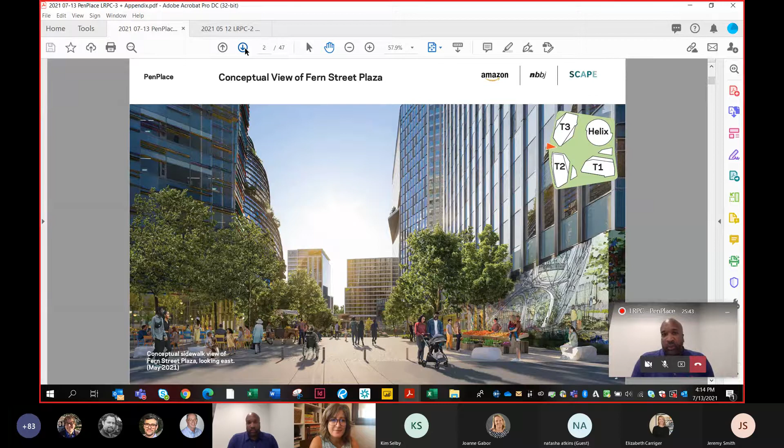We believe PenPlace presents new opportunities to create a unique and special place that will integrate with the surrounding community. We look forward to sharing the massing evolution, and thank you for your input. We will also provide more information and updates on interior site circulation. There were some great suggestions last meeting on how to strengthen the north-south and east-west connections through the site.

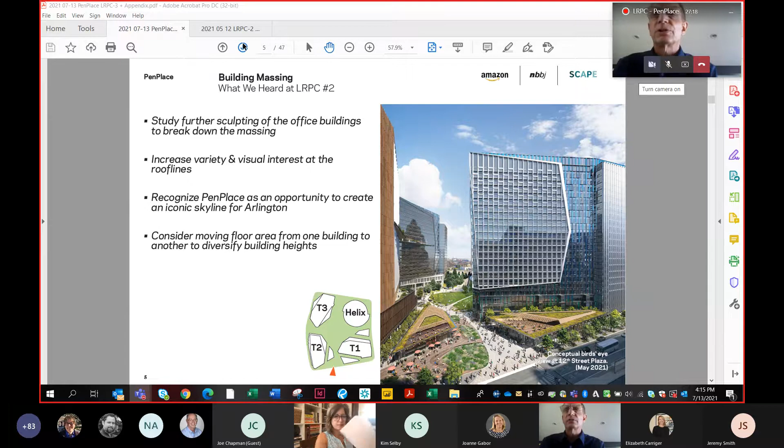So if you go to the next slide, we'll start with what we heard from you last time. This is a summary of several comments in the discussion we had. First, we were asked to study further the sculpting of the office buildings to break down the massing across the site, increase the variety and visual interest at the roof lines, which is a key element and will have a significant contribution to Arlington's skyline. And recognize PenPlace as an opportunity to do that—consider moving the floor area from one building to another to diversify building heights. We'll talk about that and the challenges around that.

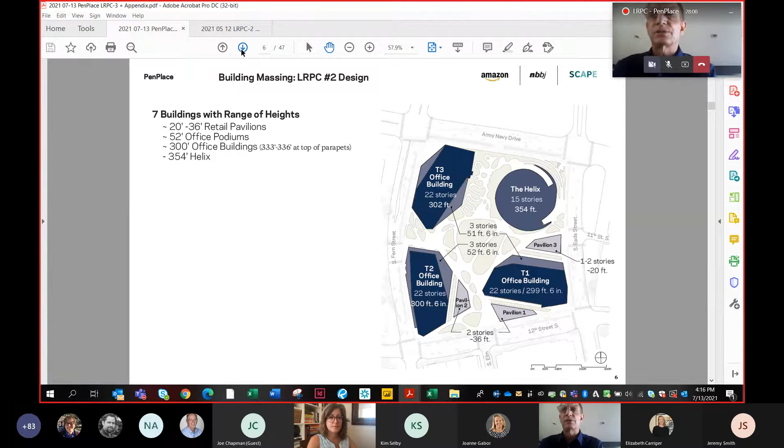Starting with the overall site plan and the massing as we shared it with you last time, we shared the size of the buildings, the heights, the footprints they occupy on the site, and talked about the spacing of the towers and various heights across the site. As a quick recap, we have 7 different buildings on the site, and the 3 office towers are each 22 stories and slightly shorter than the Helix building, which is the tallest building on the site. They're accompanied by much smaller pavilion buildings, which add a lot of interest and scale at the pedestrian level.

What we have done since then is gone back and really looked at refinement around these buildings, looking inside out and outside in, making them as efficient as we can for the owner. We've realized there are some gains to be made here in efficiency internally, which will also yield additional space on the site. You can see in the yellow zones here, the buildings have reduced in footprint in each case, and we'll talk about how that improves some of the site conditions.

First, it increases the tower spacing and the site porosity. By site porosity we mean visibility from the neighborhood into the site, to this very important central space, to the helix, to the retail, and so on. That also includes additional light into the space because the towers are slightly shorter in each case—there's an additional amount of light that can penetrate into the middle of the site. And of course, it helps reduce the bulk and the appearance of the buildings.

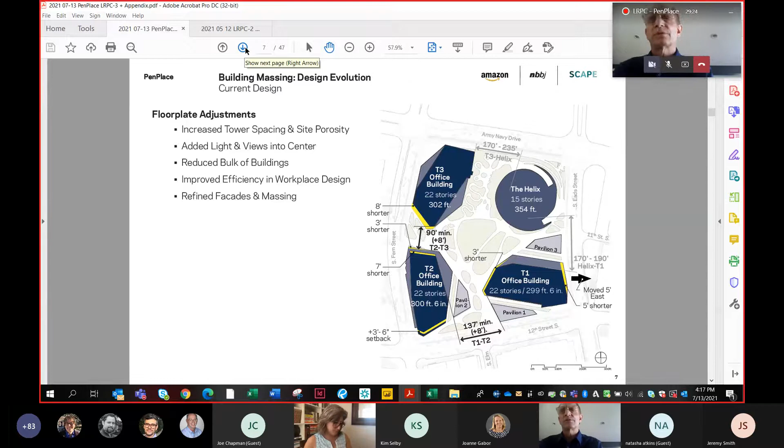I talked about efficiency of workplace already, and from that point on we'll start to think about the refinements in the facade and the massing.

First, we'll take a look from eye level now at what this change gives us from the pedestrian point of view. This is a before and after set of images. So from 12th Street, as you enter the site mid-block along 12th—one of the major entry points into the site—we're thinking very carefully about the spacing of buildings, the visual access you have as you're walking into the site, what you see, and your access to sky and daylight.

What we had initially was an overall separation between Tower 1 and Tower 2 of 129 feet, and between Tower 1 and Pavilion 2, the small pavilion on the left, of 57 feet. Then the clear walking space between Tower 1 at this closest point and a major landscape feature was 19 feet. If we go to the next slide, you'll see that all of those dimensions have increased by 8 feet.

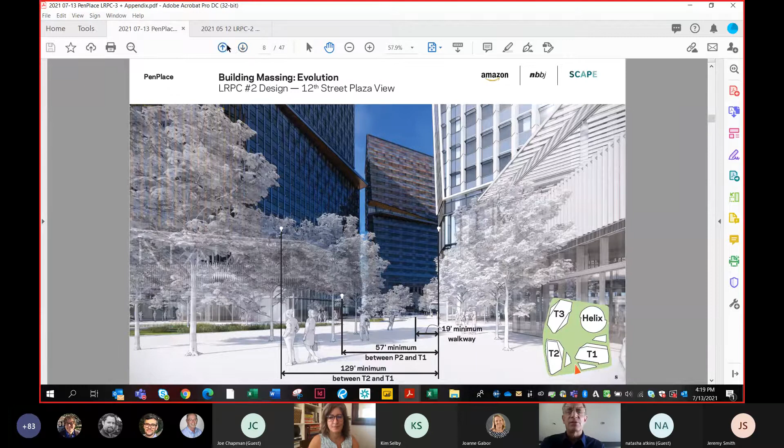Maybe it would be helpful to toggle back and forth for a moment so you can see in the image how the buildings have separated all the way up the towers. That walking space went from 19 to 27 feet. The space between Tower 1 and Pavilion 2 has increased to 65 feet, and the overall separation of towers is increased to 137 feet. So I think visually it does start to really open up the site from this point of view.

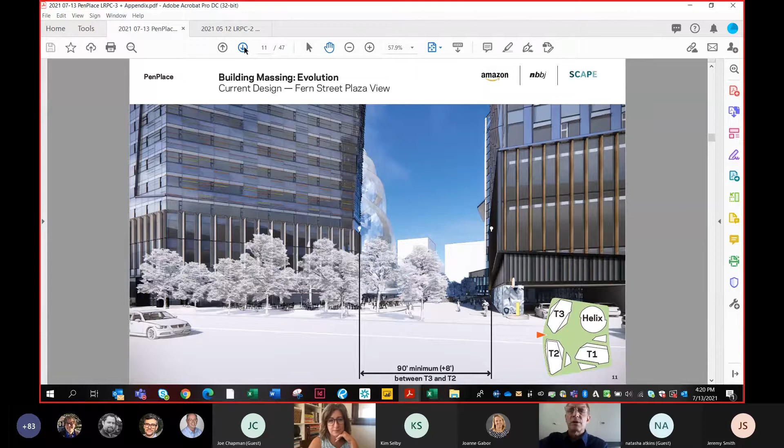Moving to the next key entry point, looking at the entry along Fern Street, we're calling this the Fern Street Plaza, between Tower 2 on the right and Tower 3 on the left. Our previous layout had 82 feet of space between those two buildings, which is generous in an urban context. But because of the efficiency we're realizing in the buildings, we're now increasing that to 90 feet, adding 8 feet again. Interestingly, even that 8 feet significantly improves your view towards the center of the site and the Helix building as you approach from Fern Street and the pedestrian crossing that will occur there.

That kind of gives you a quick look at what the massing or overall footprint changes have given us in terms of the pedestrian experience. Now we want to talk about the overall tower massing of the three office buildings and some new thinking we're prepared to share with you based on the comments you shared with us last time.

So what you see here is where we were last time we talked. Our strategy at that point was to take the glass curtain wall, the exterior skin of the towers, and extrude that up as high as we needed to conceal all the rooftop equipment. These office buildings will have a lot of elements on the roof we don't want to see — cores, generators, cooling towers — things we don't want visible on the skyline. So our strategy was to raise this glass curtain wall up high enough to conceal all of that and make it an integral part of the overall form of the building.

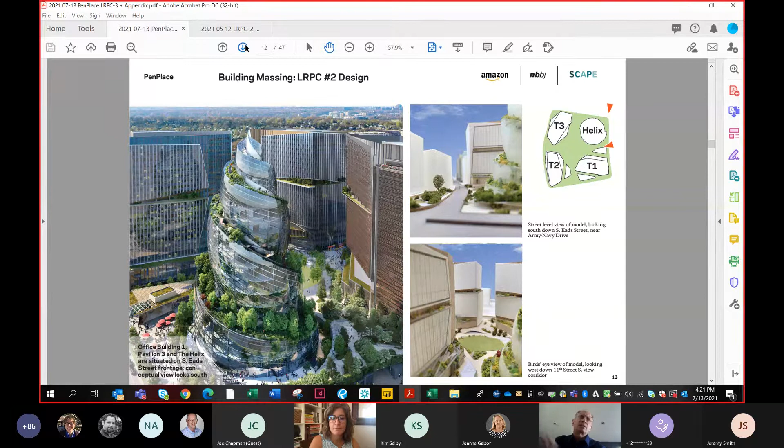I think what that yielded was kind of a flat overall profile across the site, which you all shared some concern about, and a kind of uniformity about how each tower meets the sky. So we've taken a fresh look at this and wanted to step back and think about a way we could enhance the skyline, but do that in a way that's really meaningful and honest about what's going on with the project. I'll explain what that means here in a minute.

There's a number of pretty exciting sustainable strategies that are part of this project, and one of our thoughts was, can we be more expressive about sustainability with this move? It may not be apparent here, but one of the key features on the roof now is a set of photovoltaic panels collecting solar energy and contributing to the project's energy use. That's currently in the project, but it's not visible because of the screening we're looking at. So our thought was, can we make that more integral and part of the expression of the project? We'll share that in a moment.

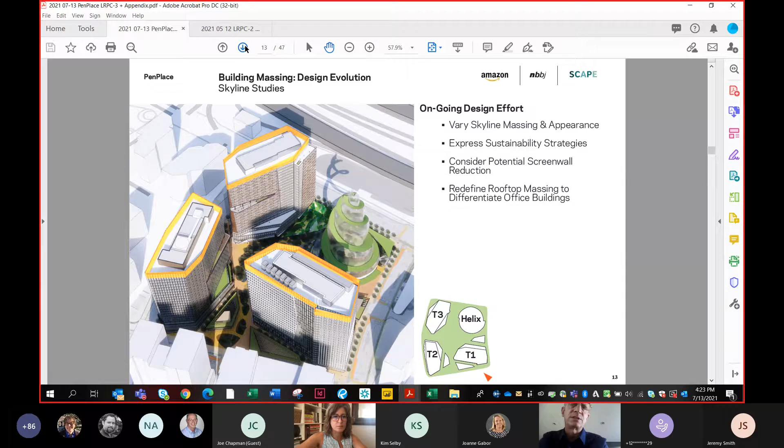So here is a very simplified view. We're really getting to the essence of the topic here, talking about skyline and building profile, stepping back near the top of the buildings.

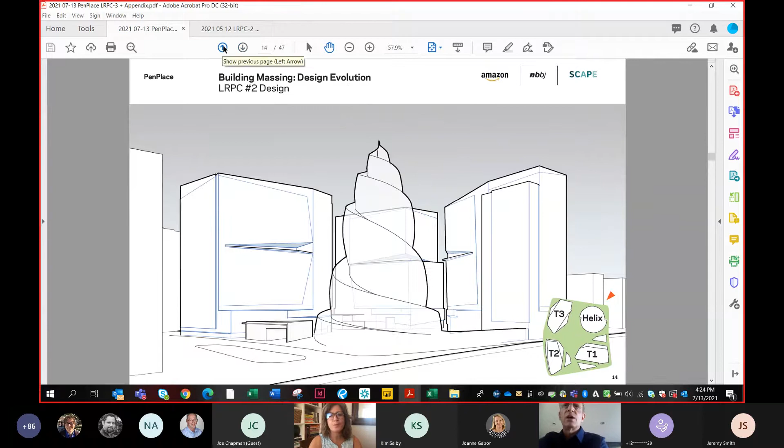So this is where we were in diagram form. You can see it from the northeast corner of the site. We'll take the helix away here for a minute, not really taking it away, but just removing it from this view so we can get a clear view of the three towers and talk about our strategy here.

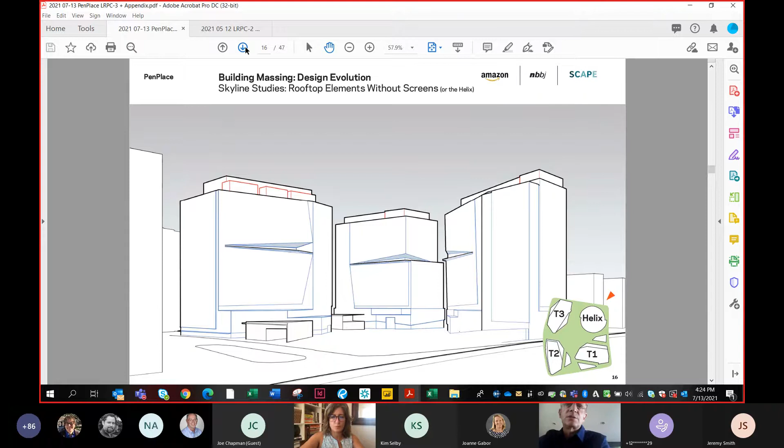So where we were, in the next view, if we take those screen walls off the buildings, you can see what gets exposed. You're seeing rooftop equipment and cores and other things on the roof that we need to conceal.

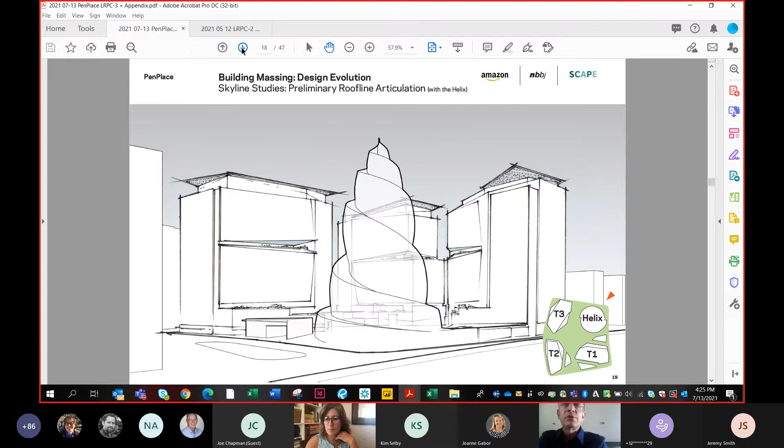So that's what it would look like, the helix back in place, and how it relates to that special building. One thing I will say here, we want to be clear that these buildings are very different than the helix. The helix is meant to be a unique structure, and this expression at the roof line of the towers, we think ought to be complementary to the helix, but not mimic it in any way.

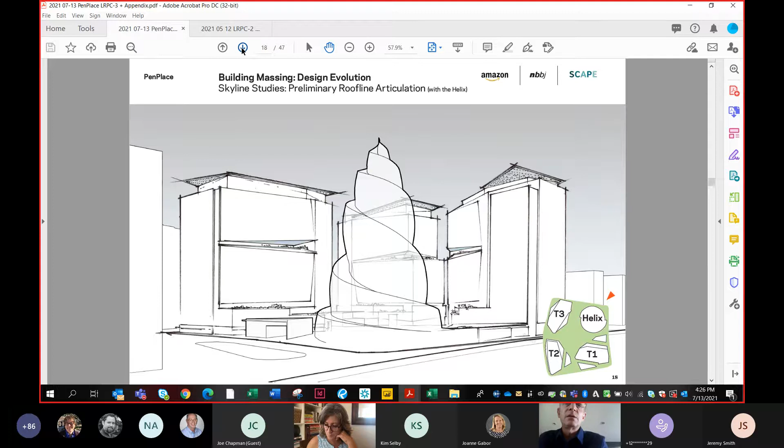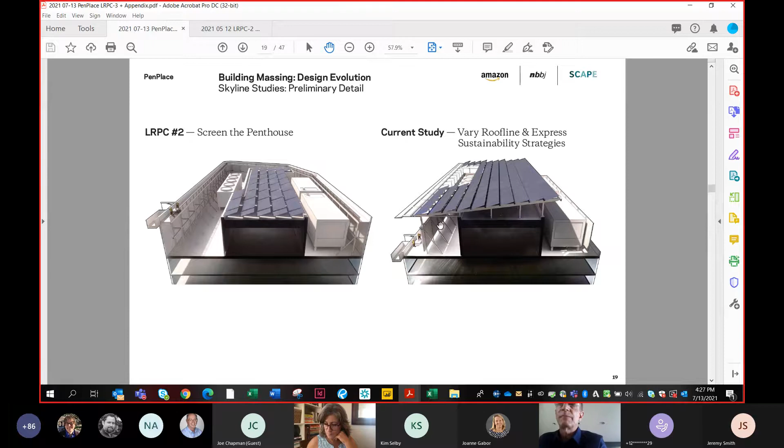So that's the big idea. And I think there's a lot of next steps to consider, and here's a few of them.

We want to continue to study the massing and changes within the height limits. Of course, all of this we're doing within the height limits that have been established, and we're verifying that with all of the right people.

We want to make sure that all of this works with facade access. It's a really critical part of how these buildings work and how they're maintained, how the owner is able to clean the glass and all of that. So that's a critical part of this from a functional point of view.

We're continuing to develop and test structural solutions for this expressive structure at the top of the building, so it looks beautiful, works well structurally, and is an efficient system.

We're going to continue to develop the visual tools we provide you so that you can fully understand the visual impact of this and how it's really going to look. These are initial sketches, and as we work further, we're going to create much more realistic looking renderings to help visualize this. And then we look forward to continuing the design refinement of this through the SPRC process.

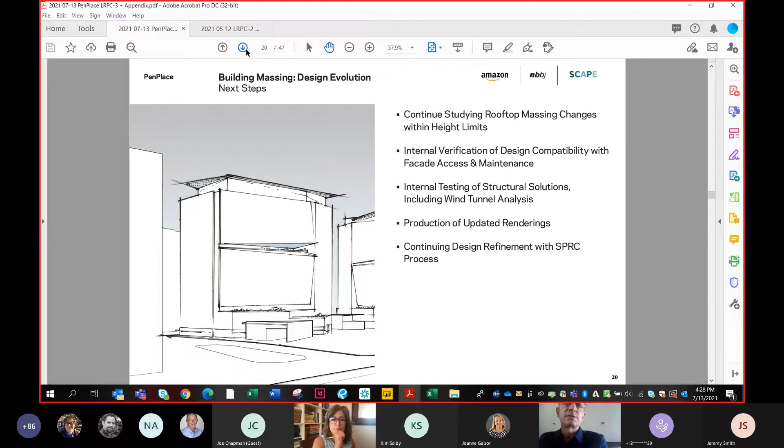Okay, so that's the conclusion of my piece of this with regard to the tops of the towers. And I'm going to turn it over now to Grace with SCAPE to talk about site circulation.

Great, thanks so much, Phil. Oh, I'm getting an echo.

Okay, so maybe we'll try again. Does that sound good to everybody?

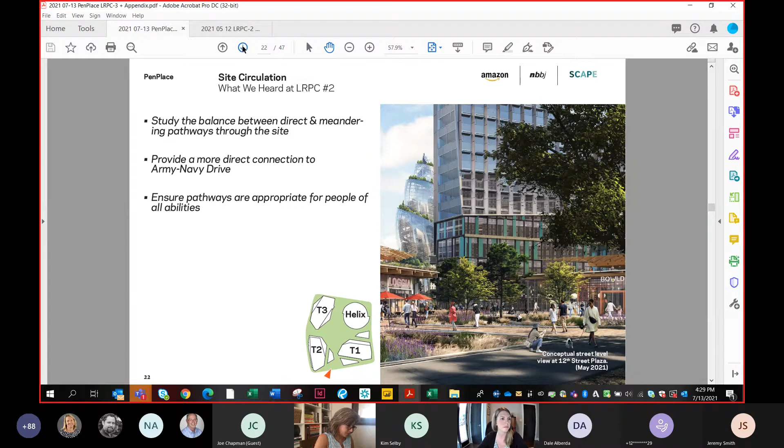The graphics on this page are likely familiar to many of you, but we really want to acknowledge the significant efforts going on with the Pentagon City PDSP. I'm going to take a second to unpack a few of these diagrams because I think it's really important for our discussion today.

On the left side with the bikes and micromobility—and anytime I say bikes, I'm also referencing bike shares, scooters, and everything else, but for simplicity I'll just say bikes—you can see in the plan diagram all of the county's efforts to create a connected and safe bicycle network for the neighborhood.

Another helpful tool that's come out of this is the ability to categorize and talk about the level of safety for cyclists, represented in the graphic with the bicycle icons. Level 4, all the way on the left, represents the most complex bike scenarios, comfortable for a bike messenger or urban cyclist, while level 1 facilities are appropriate and very safe for families and young children.

Scooting back up to the map, you can see PenPlace has been pegged for a level 1 bike facility on three of our perimeter streets, and we're really excited to provide those. We have protected north-south lanes on each street, protected cycle track east-west on Army-Navy Drive, and a protected northbound lane on Fern as well as a dedicated southbound lane there. We're really excited to provide this level of infrastructure for the project.

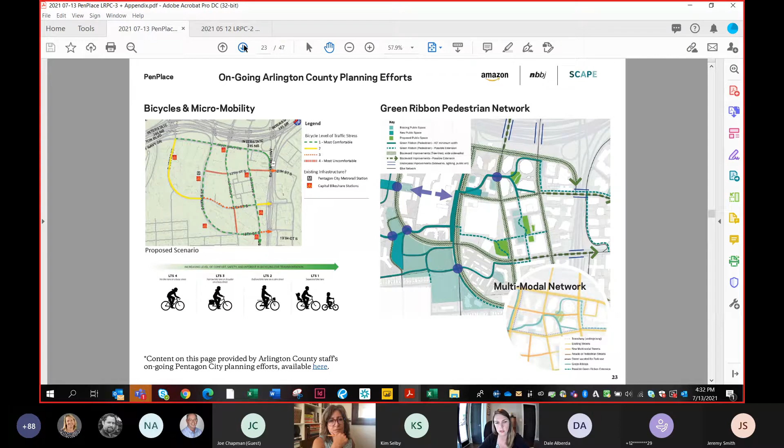Scooting over to the right, you can see the Green Ribbon pedestrian network, which is starting to have the same conversation about pedestrian networks that the county has so extensively had about the bike network. It's very apparent from this graphic that the county and our team alike see PenPlace as an integral piece of this pedestrian network. I'm excited—we're really going to unpack this concept of pedestrian safety and pedestrian network next. Just a small note, we've also seen the multimodal network in the small inset at the bottom, just to keep in mind.

On this slide, since that tool was so helpful in categorizing the different levels of bike safety, we've done something similar here for pedestrian safety. We've categorized level 3 as a high level of awareness, something like a crosswalk, and level 1 as a low level of awareness, something like a park setting.

When thinking about PenPlace, and in the future—five years down the line when this park is completely constructed—that's really what we see for this site, and we're excited to have the potential to deliver it. If you look at the graphic on the right, you can see we're aiming to provide level 1 bike facilities at the perimeter and level 1 pedestrian facilities throughout the site. We think this helps strike the balance between the multitude of feedback we've heard throughout the LRPC process and the public open space engagement.

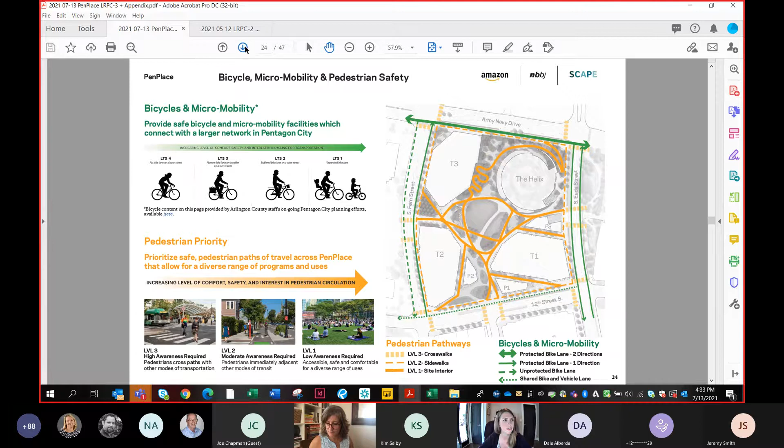Speaking of that public open space process, this is just a small snapshot of a couple of the prompts we asked our participants during that engagement opportunity. The top left bar chart and the map on the right answer the question of where are you likely to enter the site from?

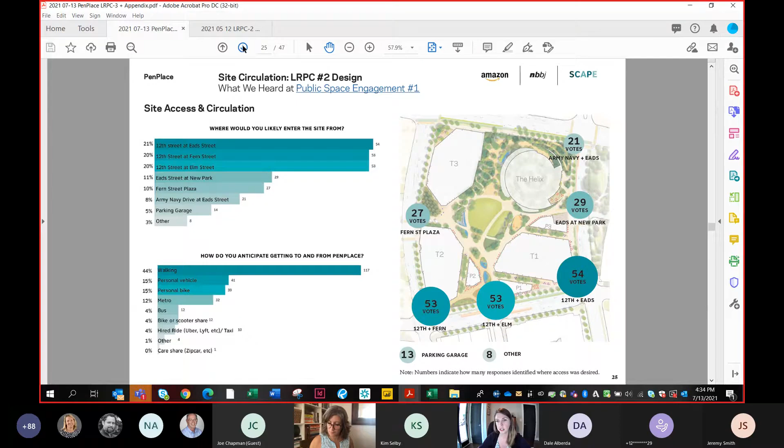I think it's no surprise that most people are going to be coming from the south, somewhere along 12th Street. Something hugely informative to us was the prompt of how do you anticipate getting to and from PenPlace. That's the bar chart on the bottom left. It's really interesting that a large portion of participants responded that they would be walking to the site, arriving by foot, and this makes us feel great about providing this pedestrian-first public space at PenPlace.

A similar conversation about the site design has been about meandering or direct path circulation through the site. We're really trying to provide a park setting and not a campus setting. In a campus, circulation focuses on door to door, versus a park setting that aims to create an elevated pedestrian experience with a multitude and variety of different experiences.

We're also looking back at a couple of the public processes that recently completed, Met Park and New Park, who had the opportunity to ask this question directly. The poll results came back very similarly between the two projects, where about 65 to 67% of participants preferred meandering paths. So we're really trying to strike a balance between all of the feedback we've heard.

If you go to the next page, I'm excited to share that where we were at the last time we saw you, on the left side of the page, the primary east-west circulation route scooted down along the south part of the lawn area. What we've been able to do is optimize a path through this east-west connection that actually shortens up that route a little bit, but makes it a bit more direct in nature. It creates a couple of exciting experiential opportunities, and it maintains the program capacity of the Central Green.

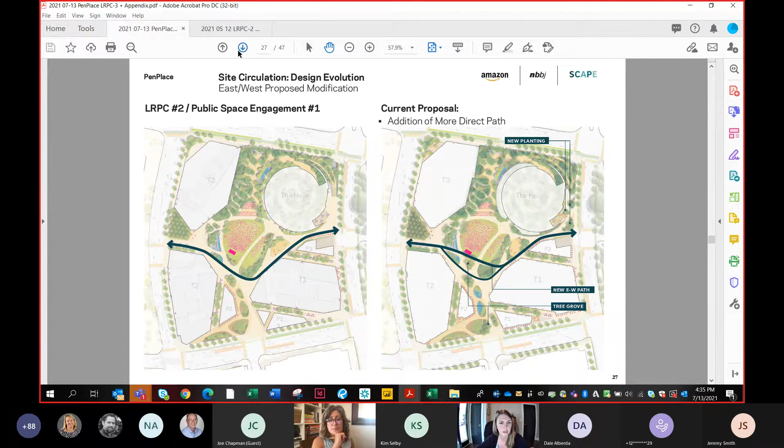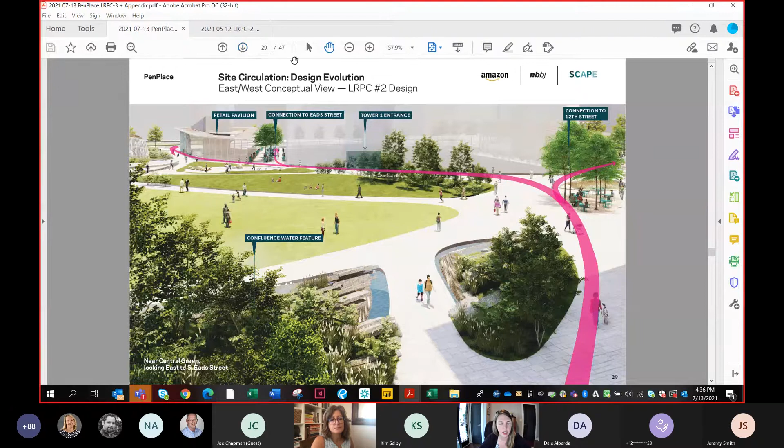Next slide. This again is a snapshot back in time. This is as if you're floating over Fern Street, looking out towards Eads Street. You can see where the pedestrian path scoops down around the south side of the lawn.

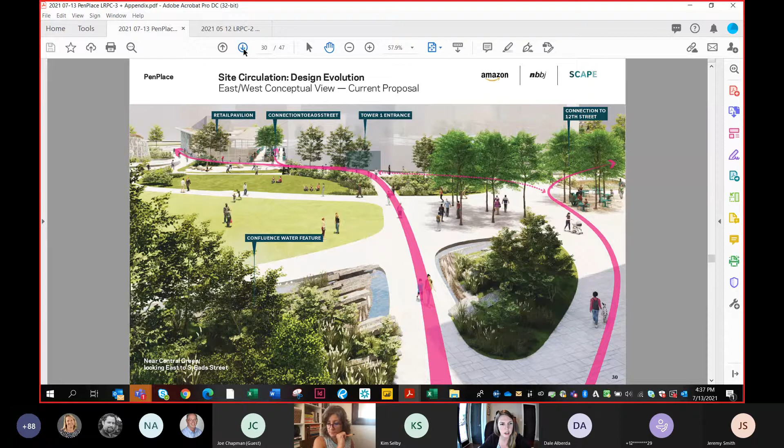If you flip over to the next slide, you can see how we've been able to straighten up part of this path. We've been able to add a few key experiences. This now pulls the primary east-west circulation through the center of our confluence water feature, which we think will be a really engaging and exciting opportunity. We've also introduced a seating grove at the south side of the lawn, which introduces shaded seating to the center of the site. And then furthest in the distance, we've been able to pull this pathway through a more lushly planted area, something we've heard overwhelming support for in the forest area, so we've included that experience further here in the south.

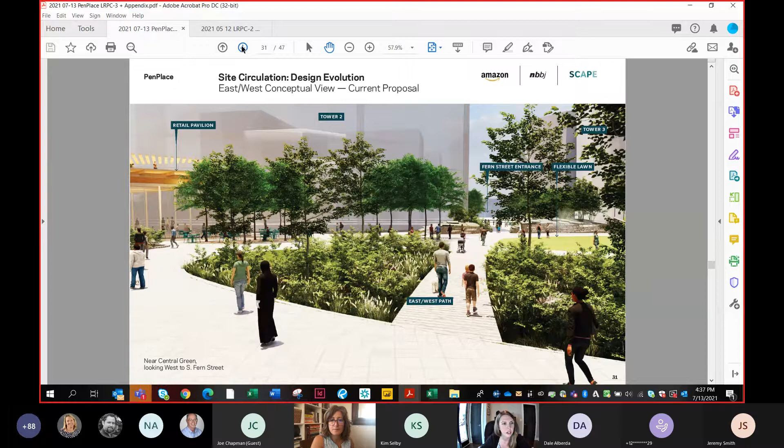So these are our next steps. We also have an ongoing public space engagement process, gathering lots of information from multiple different places, as this is obviously a key piece of the LRPC and SPRC as well. That public space engagement is slated for late summer or early fall. We are continuing our coordination with the county DPR, and also, as mentioned, the design refinements with the SPRC and public space engagement process.

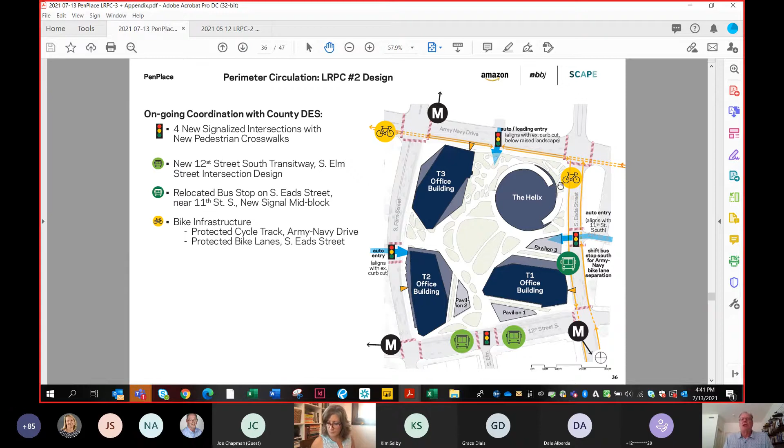And then bike infrastructure. All along in this design, we've been picking up on the county's desire for a protected cycle track on Army Navy, and the same protected bike lanes on South Eads. That has been part of our scheme for some time. Next, we'll show you where we're headed.

I'm going to repeat something Grace just mentioned, but reinforce it because it's a key element: a protected bike lane northbound on South Fern and a dedicated bike lane southbound on South Fern. That was not in the scheme previously, and you see real value in that. It connects also to all our commuter bike entrances.

We've also improved the cycle track alignments at South Fern and Army Navy, and added protected intersections, with bike protection islands at the right turns on each intersection. We've added a new bike share station near the helix, where you see that yellow symbol on the right hand side. We've already talked about the other cycle tracks, but I want to mention the cross-hatched elements on the plan, where we're providing bike racks all around the project on all sides.

And with some of the input we've gotten, we've corralled more of those, including some right along each of the main entrances to the site, so that they're inside the build-to line, giving you a place to bring a number of bikes together. And then I would mention the employee locker rooms, which you've already seen before.

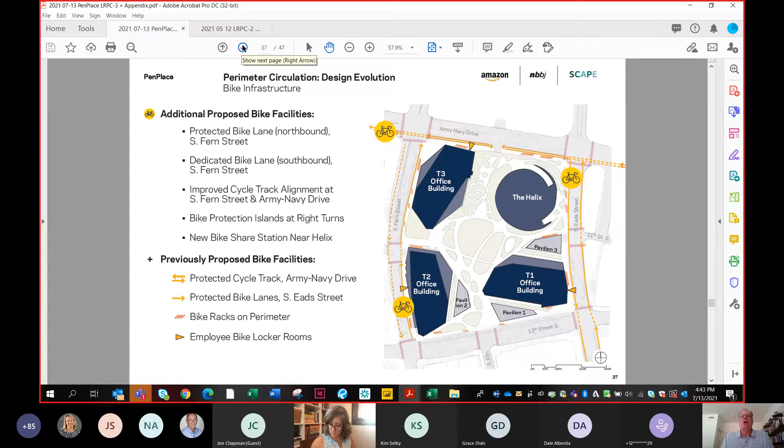But you are able to get into these buildings, into your bike storage and locker rooms, without going underground, without going through a loading dock, without going through a garage, but right off your protected bike lane into those areas.

Now, addressing PUDO, we are still anticipating providing street parking on 3 of the 4 sides of the block. Not on Army Navy, where we have the large protected bike lane, but we are looking to do that, and we can have as many as 50 spots the way we're headed.

Those would be used potentially for some of the needs for drop-off and shuttles. We could see as many as 3 shuttles, and learning from what's happened at HQ1 in Seattle, 3 spaces per office building for auto drop-off. So altogether, we'd need about 12 auto spaces and maybe 3 shuttle spaces somewhere around the block.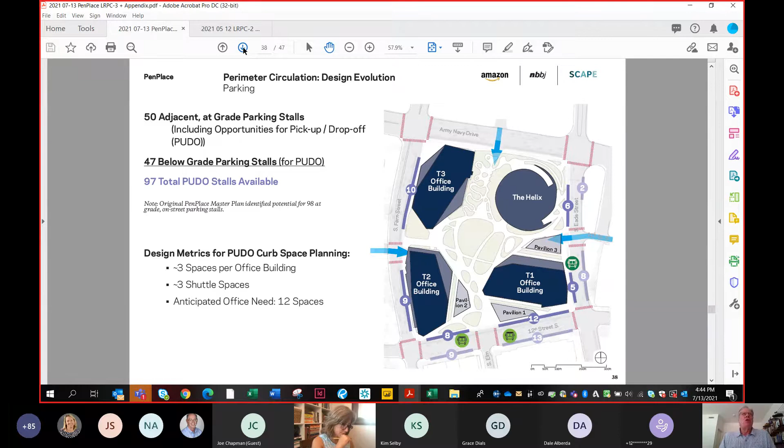That is something we would need to look at together with the county. They'll determine ultimately how many of those we have and where they go. But in addition to the 50 we think we provide at grade, we can provide additional, almost the same number underground, and I'm going to go to the next page to show you where that happens.

You did see this, I think, the last time, but I'll reinforce that with our auto entries on Eads and Fern, you can come directly in, and before you get to the ticket spreaders and gates, there is the ability to park in short-term parking, immediately adjacent to those yellow passenger elevators that take you up to the towers and the open space above.

There's also another one off Army Navy. You can get to any of these from any of the entrances, but that's the one that's most convenient for Army Navy, where it would be helpful to the community center and the child care that occurs in that area. So there's really quite a bit of opportunity for pickup and drop-off, whether at grade or underground.

The loading dock, finally—we're providing all the large loading berths required, and we can accommodate large trucks all the way to a WB-67, but those will be very rare. More commonly it's something like a WB-50 or 40, or an SU30.

So trucks are handled underground, and we've added another 6 van parking spots, since those are often used at Amazon though not required parking. Then there's ample trash and recycling stalls.

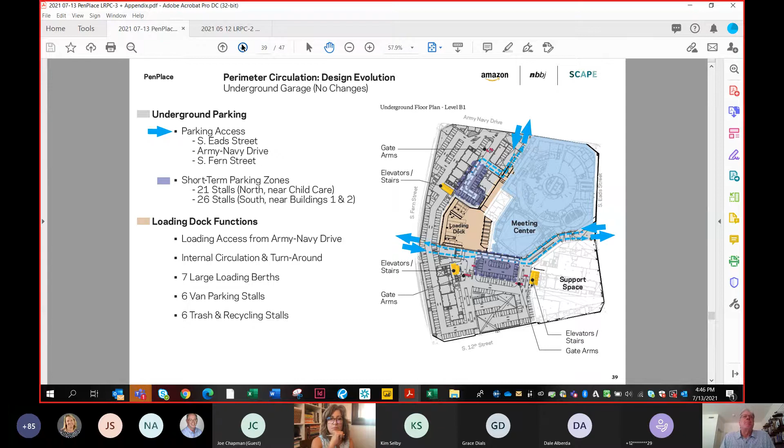So we're continuing to work with DES and collaborating on this, and particularly I know Joanne and the staff are waiting for the VISSIM analysis to be complete, which should be soon. The idea is to verify how each of the cross sections of these rights-of-way will be designed. We've already created designs for that purpose, but we need the VISSIM study to confirm all the things coming and going from the site to ensure we have the right design.

We're going to continue discussing this in the SPRC process, so more to come in the future.

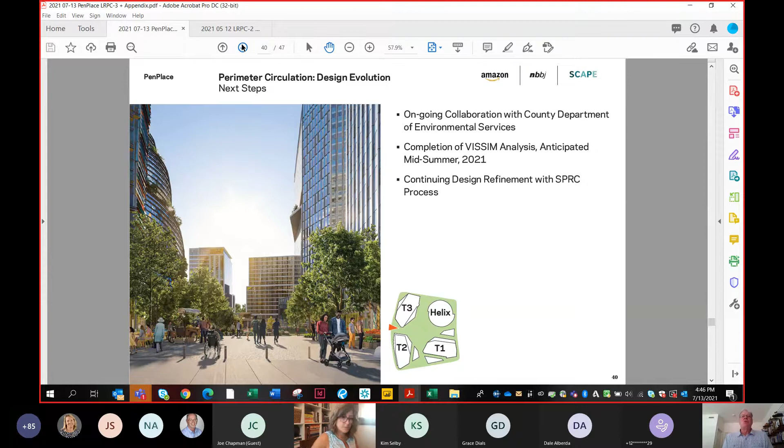So just to summarize what we've been talking about, addressing the three main categories of concern that we heard in the last two LRPCs.

On building massing, we've adjusted—in each of the towers we've shortened them in length and created greater spacing between towers, more openness for views and for sunlight. We've started to look at the tops of the towers to create a much more interesting skyline, one that will tell a sustainable story as part of a much larger story happening on the site regarding sustainable design.

On site circulation, Grace talked about creating a more direct but still somewhat meandering east-west pathway, the idea of adding a major stair at Army-Navy directly connected near mid-block and the new intersection, and the idea that we're still having other public space engagements for these things to be refined.

And then finally on the perimeter circulation, adding the bike lanes in South Fern and the bike station near Helix are probably the biggest single moves that are different from before.

And with that, I want to thank you for your attention. You gave us good input. We've worked hard to try to address the things we heard where we can address them, and we're excited about the direction this is headed. We think it's only improved the design.

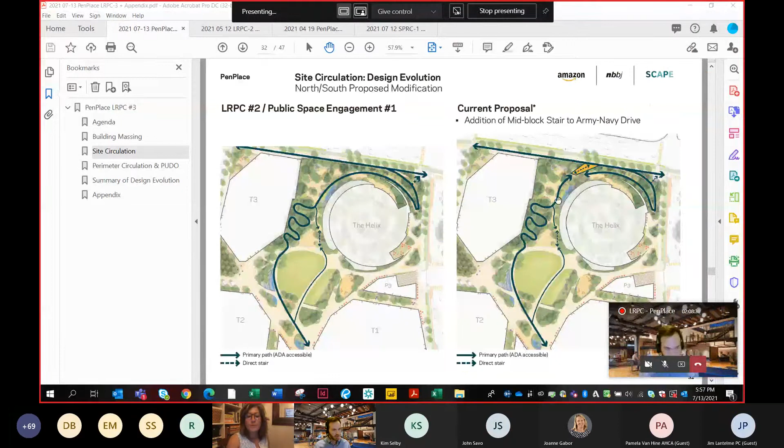This image we're looking at here is very schematic in nature, and what we were hoping to communicate today is we've heard this desire for a more direct connection to Army Navy. As some folks have mentioned, there's the possibility of more development in the future across Army Navy Drive, and there should be some porosity to that. So I think what we're looking to communicate here is...

where and generally how that might be possible. There's a lot of thinking going on right now about how that gets designed to focus on sightlines, how the ramping system would work with that stair to ensure equity of access. I think that's something we're excited to share with more rendered images at the SPRC level so folks can understand exactly how that would work.

And Taylor, I would just add that very consciously, Rosemary, we located the stair where we did and even angled it the way we did so that at the upper level, it starts where the ramp starts. It takes you down to Army Navy, and at the bottom they come very close together with a little bit of space in between where some exiting occurs from the building. But we wanted to be conscious of the fact that, as you've raised to us before, ideally we want to have one pathway for all.

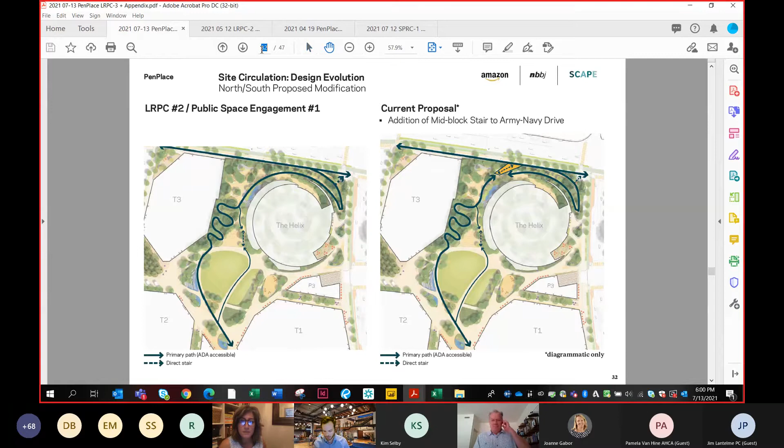And then I think, touching off of John's point about this elevation, I think there were some slides shared in previous meetings trying to articulate the general intent of that elevation. And I'd love, John or Dale, if you could jump in and do a refresher course on the intent of the elevation.

I think one of the questions that has come out of the fact that there is this elevation is, does that mean there's a retaining wall condition on Army Navy Drive? That's an area where I think we've heard loud and clear the concern that there not be one. There's been a lot of further design refinement on Army Navy Drive to maximize the amount of urban, active, transparent storefront along that walk, and where there can't be storefront, a much more sloped, porous landscaping feature. That's all renderings and design in process, planned to be shared at the SPRC.

So I know we'll have continued refinement and thoughts around that topic, but that is one we're really excited to get into, because I think those images should put some of the concerns about any wall condition hopefully to bed.

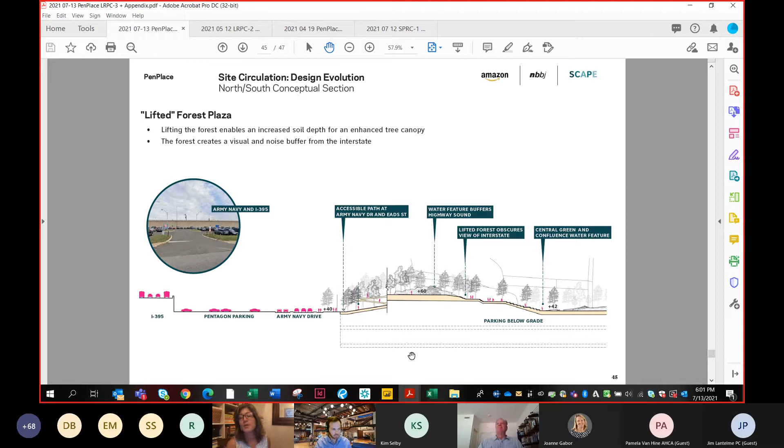Okay, yeah, and just to remind people of the reason, it's 9 o'clock and we haven't even finished the third portion of this. I'm going to propose that we continue the discussion tonight and get through it, but I want to hear the answer to the other question.

And that was the issue about whether there would be public access to the Helix. Yes, so quick answer there: the proposal is that two weekend days per month, the Helix would be open for public access, free of charge. And of course, the employees can also bring their families and friends anytime when it's open.